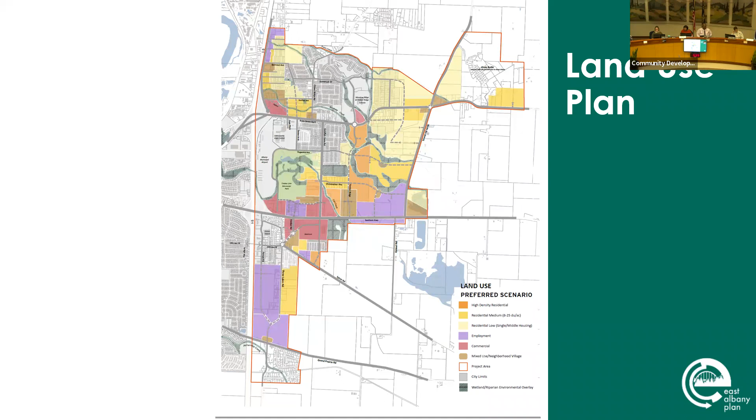Perfect, okay, all right. So I'll talk a little bit about transportation. I'm going to show you a number of slides related to transportation. I should note we have other folks on our team who specialize in this area of transportation, and they've really conducted all this work, so I'm kind of channeling them tonight.

So this is a map of the proposed street network in the area. The solid gray lines are essentially existing roadways, and the dashed lines are proposed future new roadways. I'll say just a couple of things here.

The main point of adding new roadways is to create a basic framework or system of connectivity throughout the area, so that people aren't having to travel too far out of direction to get to places, so they can easily get to other parts of East Albany and Albany more generally. There's a couple of recommended changes to existing roadways I'll point out in a moment, but generally we're showing the existing system and those new roadways in dashed lines.

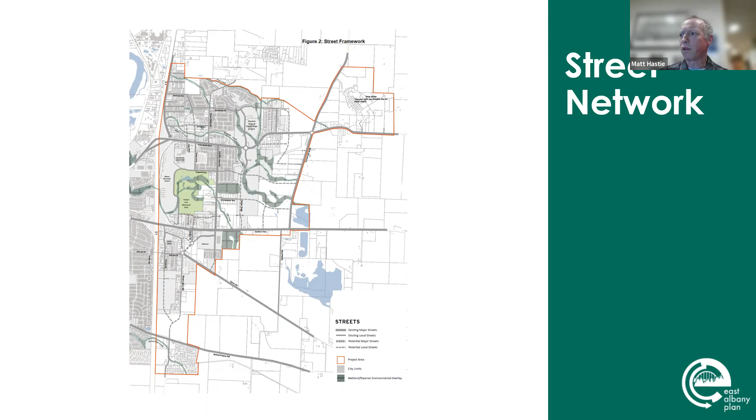This next slide shows a network of trails and pathways throughout East Albany. The solid magenta lines are potential off-street trails or pathways, generally intended to parallel creek corridors or other open space corridors. The dashed lines represent on-street bicycle or pedestrian pathways, which could be bicycle lanes within a roadway or an off-street multi-use pathway.

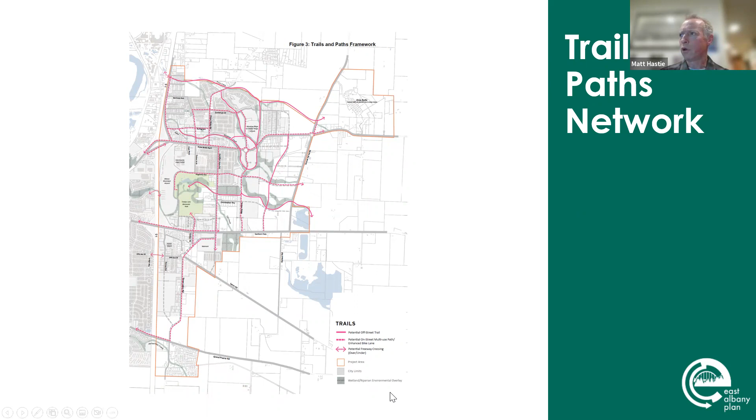The assumption and recommendation is to create a system that provides mobility and connections for all types of travelers, whether driving, walking, or bicycling. The next couple of slides show more specifics. This slide shows some proposed changes to the street network in the vicinity, north and south of Highway 20.

In this image, north is off to your right, so we've flipped the direction a bit, and west is going upwards on the diagram. The thing I want to point out here is that given the operation and constraints on Interstate 5's connections to Highway 20, the assumption is that Price Road in particular will ultimately be a right-in, right-out roadway.

You won't be able to make left turns off of that onto Highway 20 and vice versa. To address that and make sure there's the ability to get from the areas around Price Road without going too far out of direction to get back over to Highway 20, the proposal is to install a signal at the intersection of Timber Street and Highway 20.

And then create this connection north of Highway 20 from there up to Price Road, also improving the connection from that roadway essentially along or parallel to Blue Ox Drive over to Goldfish Farm Road, so that connectivity is maintained and people can travel within that area, recognizing some of the constraints on those intersections that relate to the performance of both Interstate 5 and Highway 20.

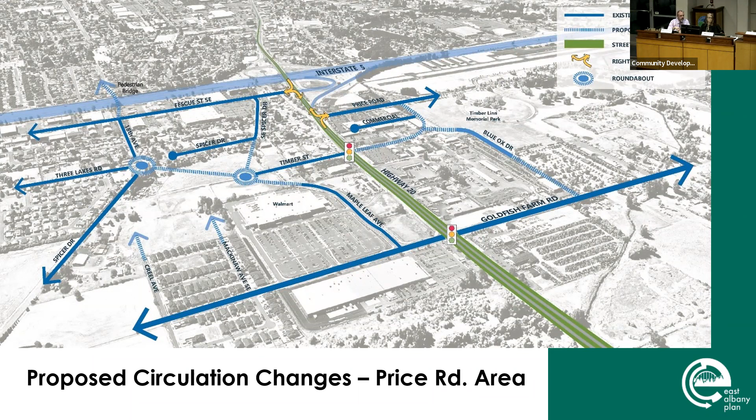In response to the mayor's question on Three Lakes Road, the development going in down there won't have a connection out to Spicer—they'll be connecting right to Three Lakes; it doesn't go that deep. This is really a zoomed-in version of what was already in your packet for the street framework, primarily focusing on the circulation changes, where down in the Three Lakes area we're not proposing any changes. So there's going to be egress and ingress on Three Lakes Road from that development? Correct. Good to see that. Okay, thank you.

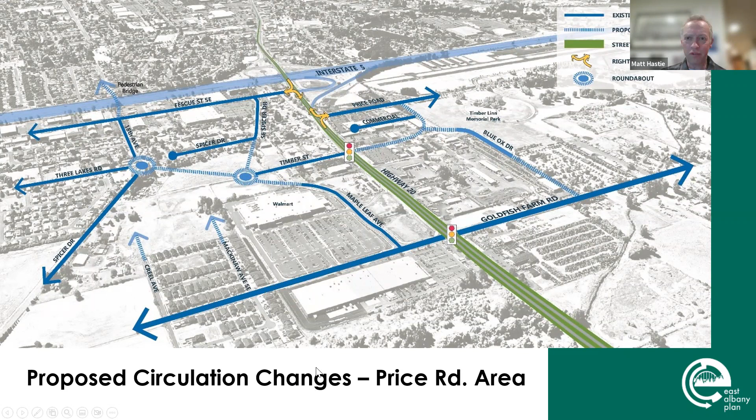So the next thing I'm going to present are some different conceptual street designs for different types of roadways in the area. I'll talk about those a bit. We'll start out with Highway 20.

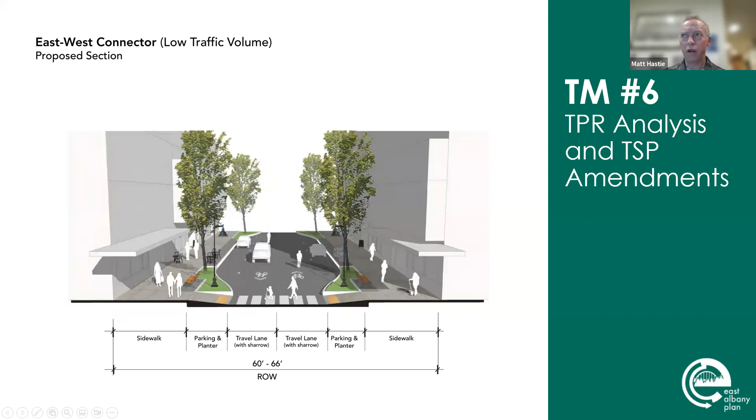This would be a potential treatment for a street with lower traffic volumes and slower speeds, where bicyclists and vehicles would share the roadway. You would potentially have parking on each side of the street, but curb extensions or bulb-outs to help pedestrians getting across the street, making that crossing shorter and making them more visible to vehicles, and fairly generous sidewalks so you'd have opportunities for outdoor seating and things of that nature. So that's one kind of east-west connector option or concept.

This is a second one, where if you've got areas with essentially development or buildings on one side of the street but more open space areas on the other side—that's what you're seeing on the right side of the graphic, a more open space condition. The sidewalk might meander a little bit, going through more of an open space area. But in other respects it's pretty similar to what you saw in the last graphic.

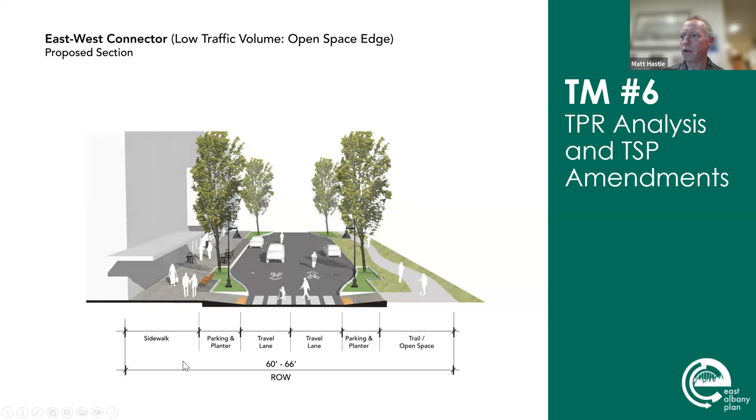And let's see, I'm gonna see if I have one more of these or not. Nope. So I'm gonna go back up here and I'm gonna just repeat some comments that that Ron Irish made

I'll repeat some comments Ron Irish made to our committee, which is that where we have new roads coming through areas, we're really going to be looking to develop or design to something like these cross sections, or something similar. But there are some existing roads where you only have so much right of way, so we may not be able to get all the way to what we're showing here.

There's going to need to be a certain amount of flexibility depending on how much right of way the city has and where buildings and other land uses are located. So these represent the goal, or the ideal, but it may not be realistic to achieve everywhere in this area, particularly when we're improving existing roadways. I just want to note that.

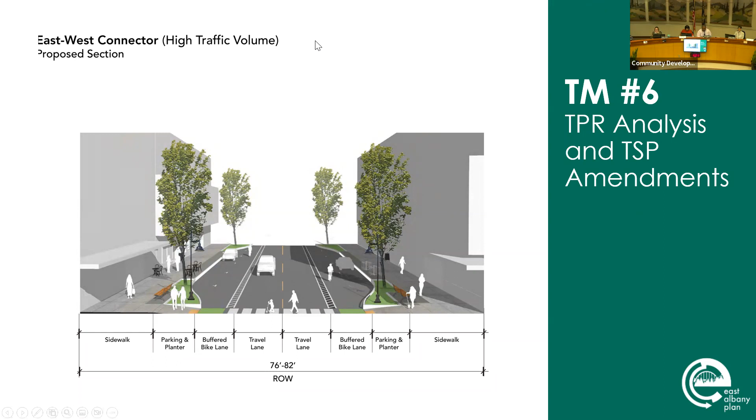Matt, I noticed you were using the term buffered bikeway to characterize all of the bikeways present in the slides. I noticed there was one you called a buffered bikeway, but it looked like it had more of a vertical separation element, which would be characterized, like in a report by People for Bikes published around 2017 or 2018, as a protected bike lane rather than a buffered bike lane, which is just more space than the standard bikeway we normally see in America.

So I just wanted to clarify, are we doing more of a protected element like the one you have right here on the screen? Or are we doing, I just want to clarify, what is the actual plan for bikeways? Is it protected or buffered, or is it a mix of both?

So in particular on Highway 20, we showed what you're defining as a protected bike lane. It does say buffered bike lane here, but really this is showing that kind of vertical curb or physical separation. So for this one in particular, we are thinking about a protected bike lane as opposed to just a buffer of a couple of feet that's striped.

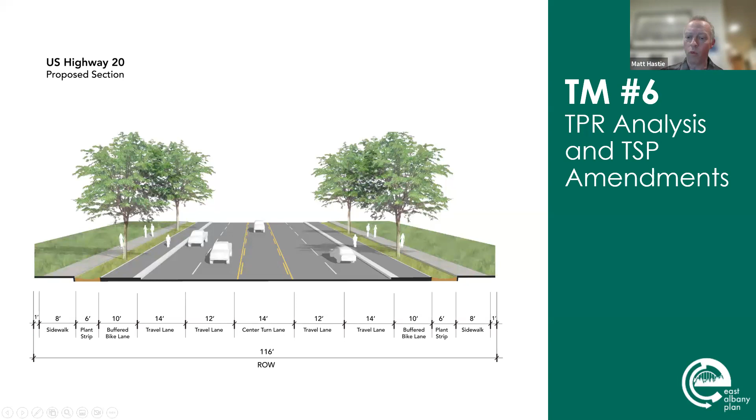On some of the other graphics, what we showed was generally more of a buffered bike lane, with the separation primarily being striping. But that doesn't mean you couldn't have, in some of these cases, a similar treatment to what I showed on the previous slide, where the bike lane is raised to provide additional protection and safety.

Exactly which streets we might do one or the other, we haven't really gotten to that level of detail. So there's a certain amount of flexibility in how and where you do this, and a lot of times that gets determined when you get into a more detailed street design or corridor design process. So I think we probably want to be clear in the report about what we mean by these terms, and note where there might be flexibility in future detailed design and planning.

And a lot of that's going to have to do with speed and volume of traffic to some degree. It's also going to depend on money, and what the city can afford to build. So I don't know, I know that's not a perfect answer, but does that help answer the question?

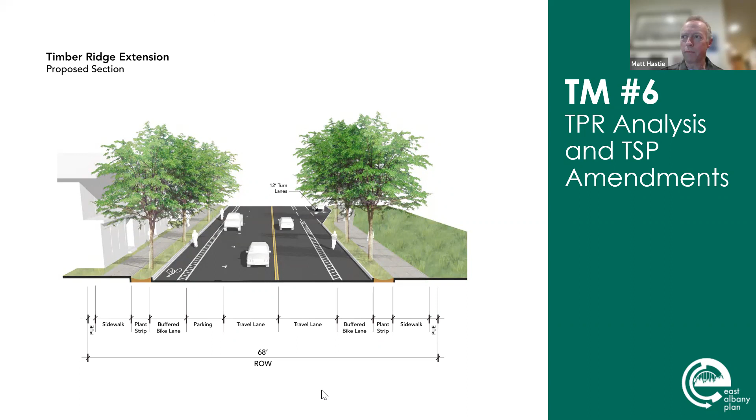So the next thing I'm going to talk about is other types of infrastructure, like water, wastewater, and stormwater infrastructure. In this case, I'm sort of channeling the civil engineers. We have a firm called Keller Associates on our team, and they did this work at our meeting last week. Stacy Belcastro was there, and she noted that what we're presenting here is consistent with the city's master plans on that, so I'll just mention that.

So a couple of things generally that I want to say that apply to all three of these things: the city does have facility master plans for water, for wastewater, for stormwater. Those have been updated at different periods of time. We looked at those and built off of those for all of the work that you're going to see on these next few slides. In a number of cases, what we're showing you is already in the plan for your infrastructure facility plans, so some things are already in the plan, other things are not.

What we did was take a look at, based on the level of development in this area, what types of facilities would be needed to convey and store the water, for example, and to convey wastewater and to manage and treat stormwater in the area. So some of the things I say about each of these facilities will be similar.

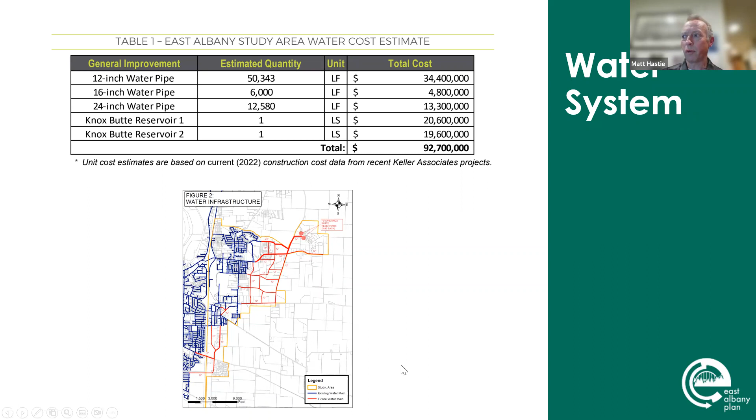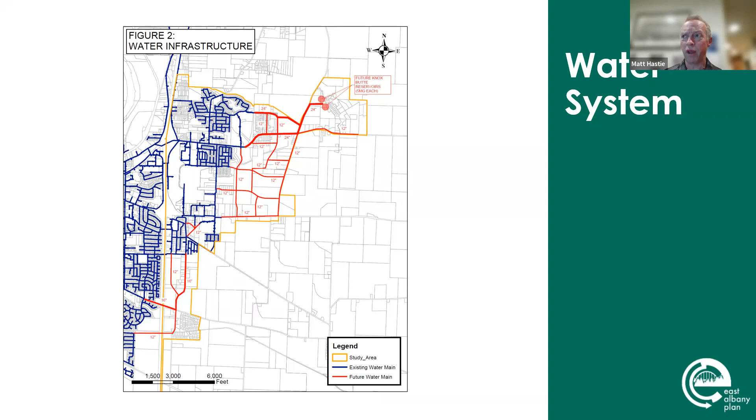So this is just summing up the costs of some of those water facilities and showing you a map of where they're located. This just zooms in on the map a little more, so you can see the locations of those reservoirs and also the locations of the different size pipes that would be needed to convey water in this area. So that's kind of what we're showing here.

Then the next couple slides do the same thing for wastewater facilities. So again, we're identifying the size and location of those larger scale wastewater pipes, and also lift stations where gravity isn't enough to get the wastewater to flow where you want it. You need lift stations to get it from one location to another. So there are a number of pipes and lift stations identified within this area, to meet those long-term development capacity assumptions that we're showing in the East Albany plan.

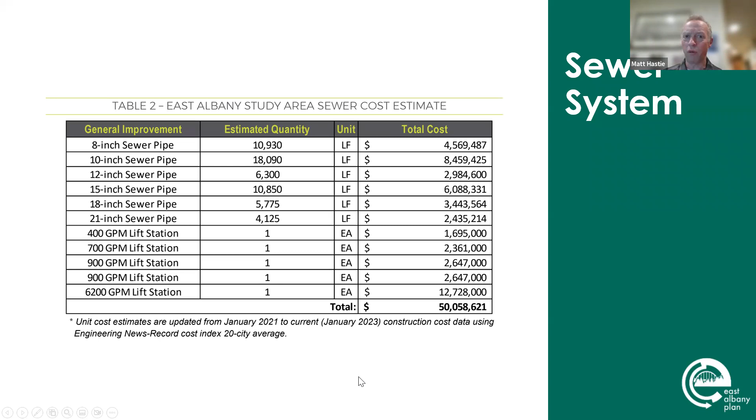The other thing I'll note is that these are the larger scale conveyance pipes, versus local streets and smaller pipes that just serve the homes in those areas. Those are typically put in and paid for by development at the time that development occurs. So we didn't show all of those pipes on these plans, but that gets dealt with at that time rather than added to your facility master plans.

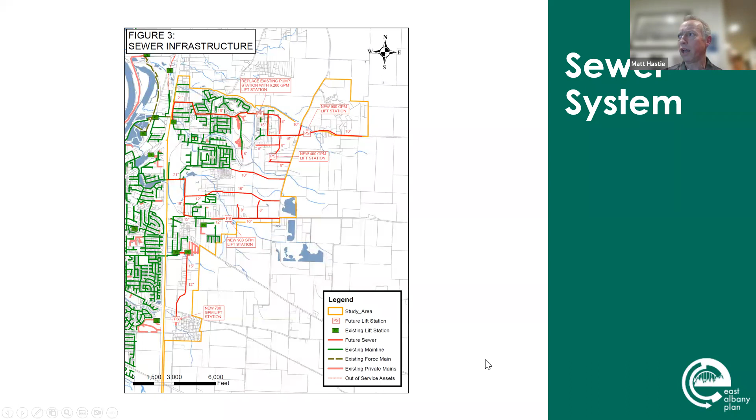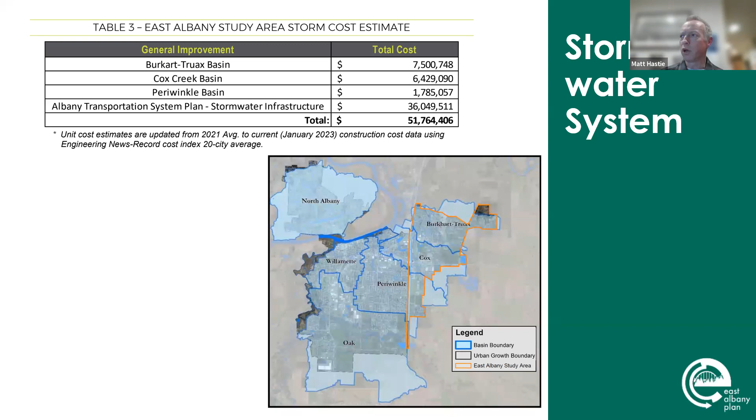So essentially, there's a couple things that would be needed in terms of stormwater. One, some of the additional development and impervious surface created through development would exacerbate some of the deficiencies you already have identified. So you're going to need to continue to deal with those existing deficiencies, and also build some additional facilities. In large part, those are pipes that get put in as part of the transportation system improvements, as well as some non-piped, more natural stormwater management facilities as development occurs. So that's a quick summary of the stormwater system improvements.

So again, I'll take a pause there and just see if you all have any questions or comments. And if I cannot answer them, then we may need to get back to you with the responses to that, but I'll do my best.

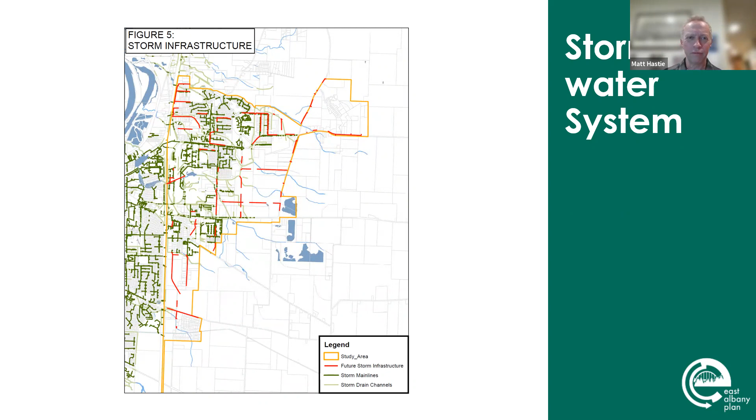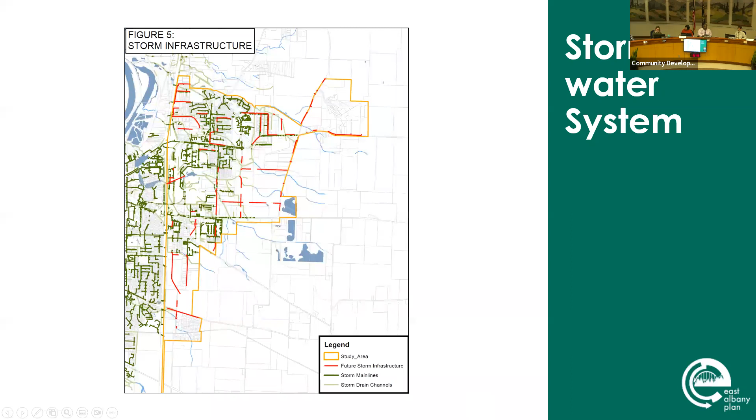Okay, I think I am turning it over to... that's just kind of a repeat of the slide you saw earlier. And then I am going to turn it over to Andrew to cover the next part of the presentation.

All right, thank you, Matt. My name is Andrew Parrish. I also work for MIG. I'm here to give Matt a little bit of a break. I'm going to be talking about the comprehensive plan and zoning implications of this plan.

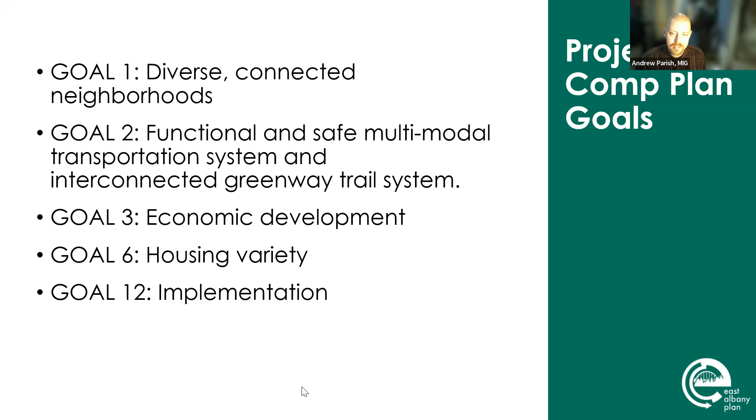So the materials in your packet have outlined a series of comprehensive plan map amendments. These are basically changing the colors on the map to replace the urban residential reserve designation that's in East Albany today, which is a fairly broad designation that doesn't provide a lot of certainty to property owners. So we want to change that to either residential, employment, or mixed use designations so that folks know what's going to be happening on that property. And then there's a set of zoning map amendments that will be consistent with those new comprehensive plan designations. But we don't want to get ahead of ourselves, and we want to make sure that we have conversations with property owners so that we're not doing anything they're not comfortable with.

Reconvening. There you go. Thanks, Andrew. We're back.

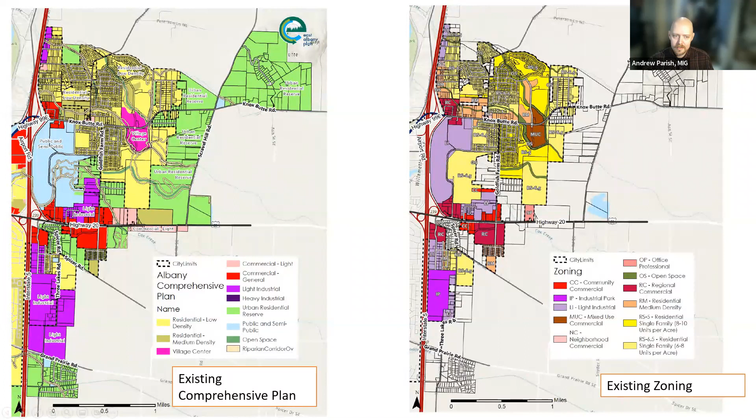There is one portion that is recommended to go to a commercial designation just to ensure that there is something other than residential that happens at that roundabout. And let's see what else is worth mentioning here. Some of the areas are proposed to be changed from light industrial to a kind of broader employment designation. And these suggestions are all being conducted along with discussions with property owners, as part of the broader planning effort underway.